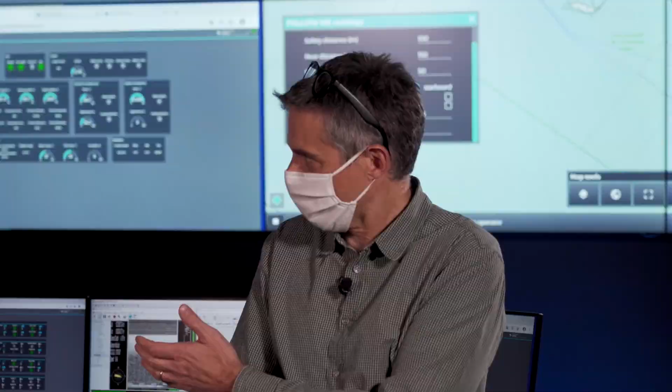We'll go into more detail in a second, but just a bit of background on what we're going to do and why. We had hoped to meet many of you at Oceanology International in London this year. We haven't been able to do that. One of our goals at that event was to show DriX in operation, and because we haven't been able to do that, we've made this small movie.

What we're going to do is show you the operation with two DriX, which we're going to control in the Mediterranean, in the south of France, doing two separate missions with two different payloads and two different survey softwares operational in each, all from the control center here in Paris. We want to show some features of the software and the general DriX control environment.

Maybe Olivier, you could start by giving us a quick overview of what we've got here in this control center and how it fits together. On the big screen just behind us, we've got the DriX HMI, which will allow us to see all of the parameters from both DriX and actually conduct and supervise the operations. We've got access to all power supply and all telemetry data inside each of the DriX.

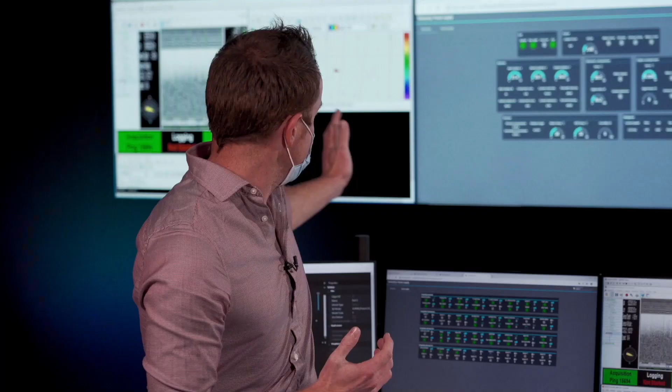We also have the survey navigation softwares. We're using two different kinds of navigation software for this demo. These four screens are actually repeated on this monitor here to give the operator a nice look at all of the data, and being able to do all of this quality control as the operations are going.

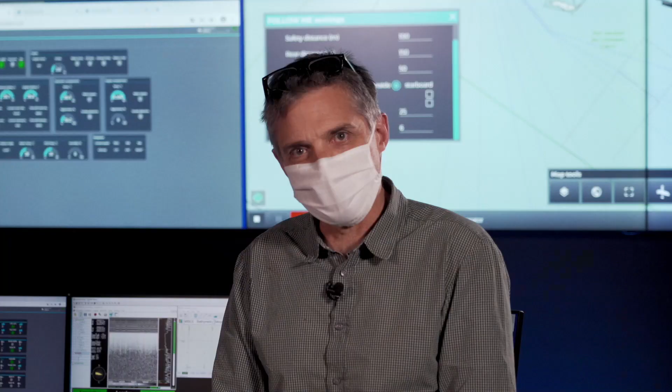Okay, so quite a simple setup. We've got the survey operation, which is really what this mission is all about. We've got the vessel control for each of the DriX, and then this general overview of the entire mission. Okay, great, that's a good introduction, Olivier. So now let's get to work.

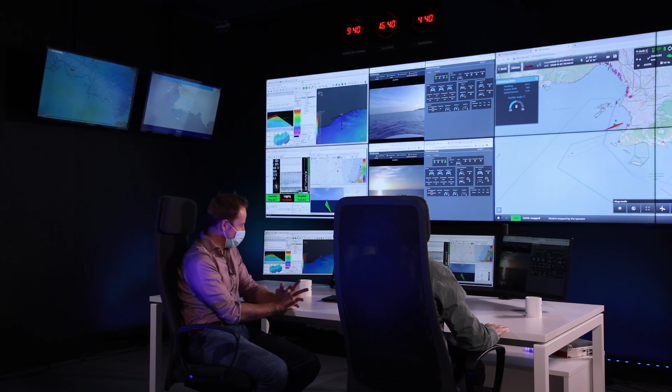Okay, so Olivier, we've got the setup, we've got our two DriX on station. We can see on the big picture here the overview of the two DriX. So let's get to work. Where are we going to start? I suggest we start with Marseille. What do you think? Okay.

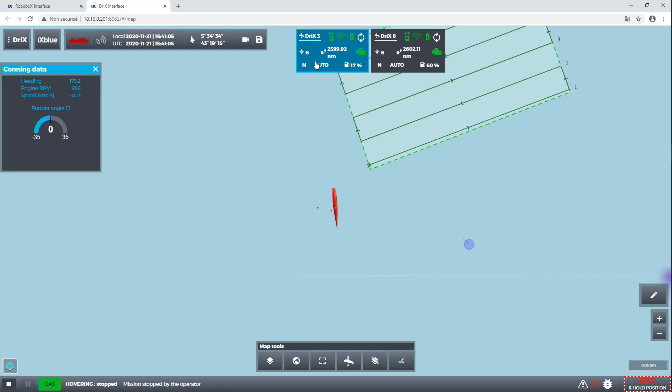So what I'm going to do first is put the DriX that is in La Ciotat in standby. We don't want it to drift around. So from the main DriX HMI, I'm just going to click on DriX number 3, which is in La Ciotat. It's going to zoom in onto it. So here on the screen we are in La Ciotat. And I'm just going to use a mode that we call hovering. So right-clicking, hovering mode, then it draws a circle, and DriX will have to stay within the circle.

I just define the radius of the circle. For example, let's put it to 50 meters. Okay, I'm going to put it to 8 knots. And then I have the possibility to launch it on its mission using the play button. It just starts, and then you see a green route that is designed.

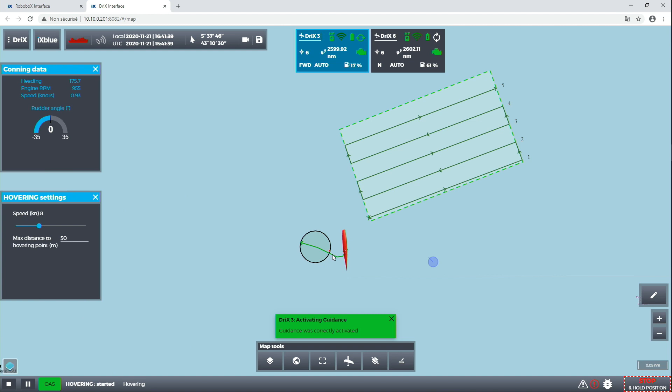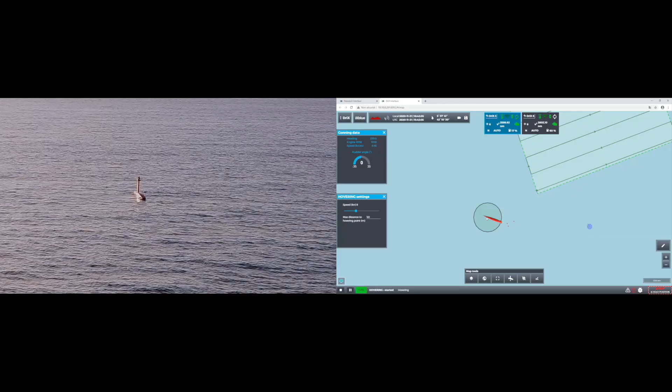That's the computation of the route to go to its mission, and you see that it's turning and going into that circle. In the conning data here you see the speed, you see the heading, and you see the engine RPM. As soon as it reaches the middle of the circle, it will stop. And if the waves or the wind are blowing it out of this circle, it will directly maneuver back in. Okay, so this one is in standby.

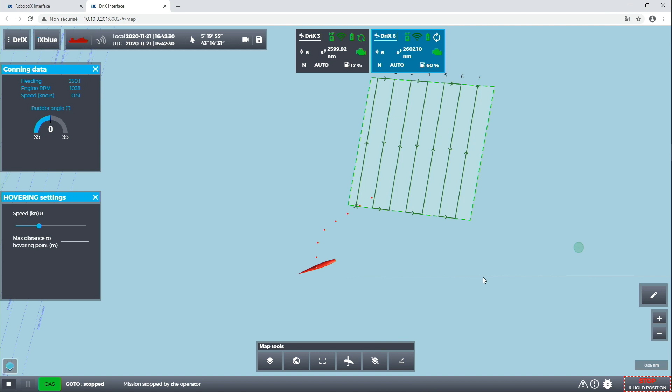Then I'll click on DriX number 6, which is the one that is in Marseille. And then, boom, we're in Marseille on DriX number 6. And we've got our lines that are ready for our survey. We've just done the sound velocity probing using our winch that is installed on the DriX.

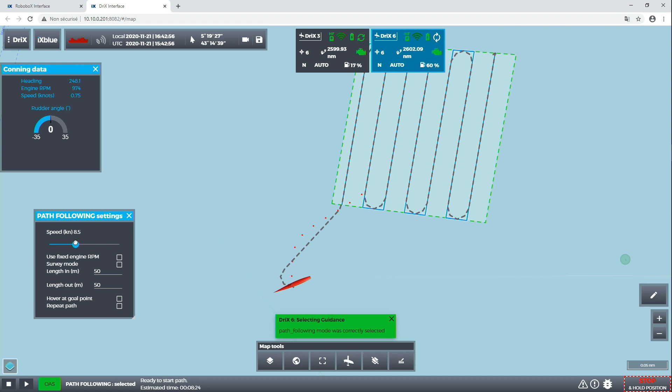So now we're ready to actually launch the survey lines. More or less the same process that we do with the hovering. This time I click on the lines that are displayed, then right click, select the line that I want, path following mode. I get access to a menu where I can define the speed that I want to perform my survey at. I'll define a survey mode because I want all the turns and everything computed by DriX. So I have my theoretical lines from my survey navigation software that I transferred onto the DriX, and it's taking care of the rest, basically.

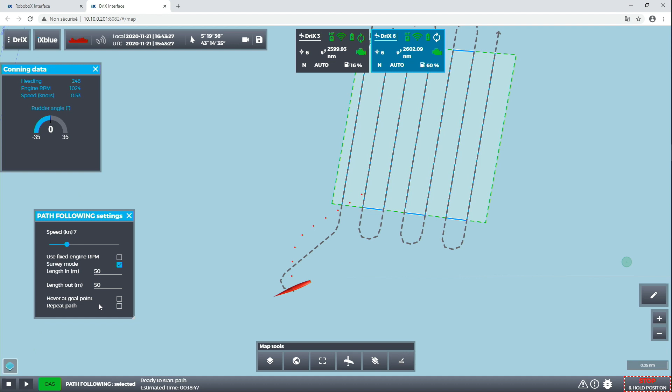I put a length in, length out, which has some distance that I want to add so that DriX is able to be well aligned with the theoretical line. And I can launch it onto its survey. You can see the same green route, and now DriX is ready to start its survey.

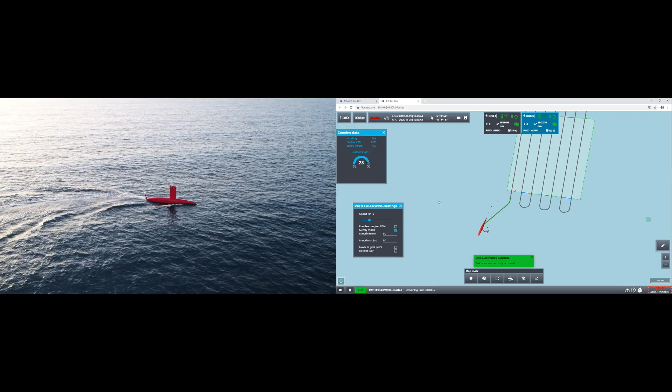So we've got our auto recording on for our survey data, and we've got the anti-collision on, so we're ready to leave it to its mission. I see on the screen that it shows the remaining time of the survey plan, which is 18 minutes and 22 seconds, counting down as we go.

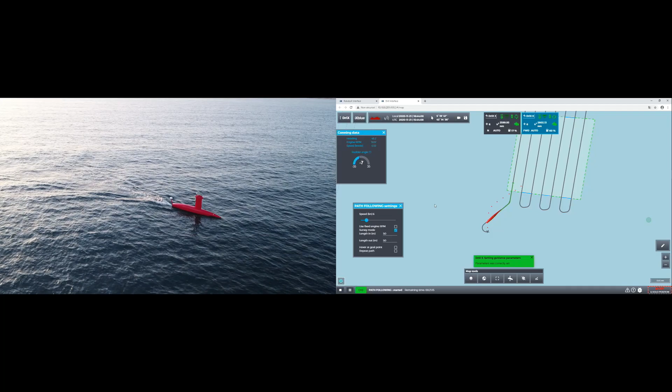Exactly, so that's up and running. We can leave it to itself. It's going to perform the survey route and the anti-collision in case there is something on the route, and take care of any obstacles on the way.

So just a quick note on obstacle avoidance. The anti-collision is a combination of several sensors that we integrated in DriX. The first one is the AIS receiver, so we are receiving the positions, the course over ground, and the speed of other vessels that are using AIS.

Then we've got three other components: the infrared camera, the LiDAR, and the radar. The infrared camera looks in the direction DriX is going and plots even small objects like buoys. The LiDAR does the same but all around DriX, with a range of about 100 to 150 meters. And finally the radar gives us a bigger picture of the environment around DriX with a range of about 1,000 meters, and is efficient at detecting vessels moving fast.

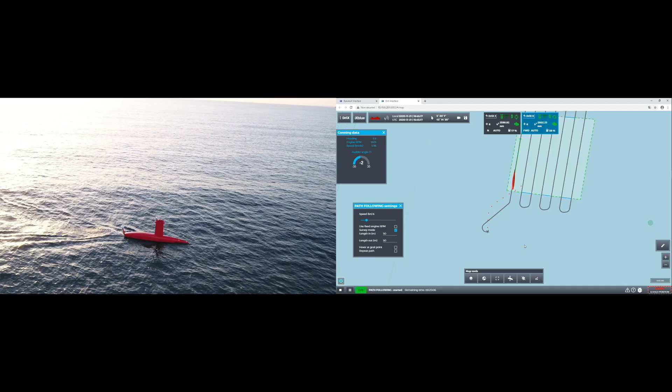Sure, and then the collision avoidance algorithms are basically amalgamating all that sensor data and resolving any issues. Exactly, combining everything together, and we'll be able to see the results afterwards.

You can see already on the screen a green circle on the right side of DriX, which is an AIS plot, so there's a vessel there. And when it's one of the other sensors, it'll be a blue circle, so we'll be able to see if there's a vessel on the way.

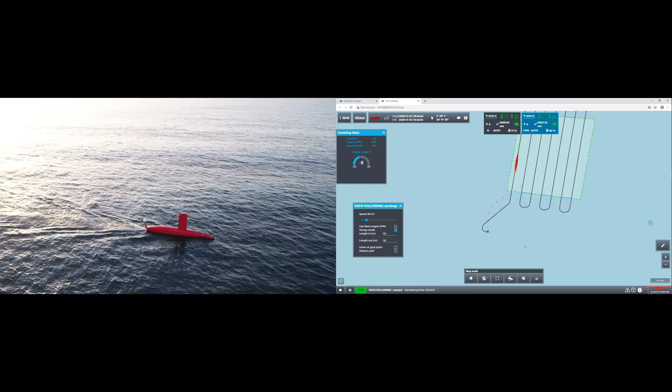So we're going to leave this DriX getting on with its work, and let's get back to put the other one to work. Okay, back in La Ciotat.

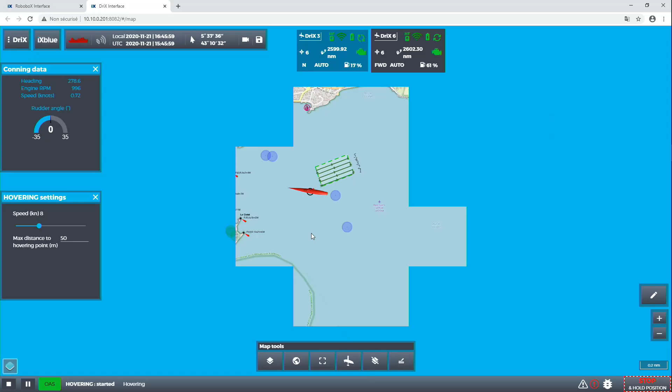Same procedure, I just click on DriX number 3, and I'm back here in the middle of the Bay of La Ciotat. So DriX is still inside its circle. We can see from the plot that it moved, but it's actually still inside.

So I'm just going to stop this mission, because for it this is a mission staying within this circle, and I'm going to launch the survey lines just like I did with the previous DriX. Same procedure: you can create your theoretical lines within your survey navigation software and then just download that into the DriX HMI to have them displayed on the main DriX software.

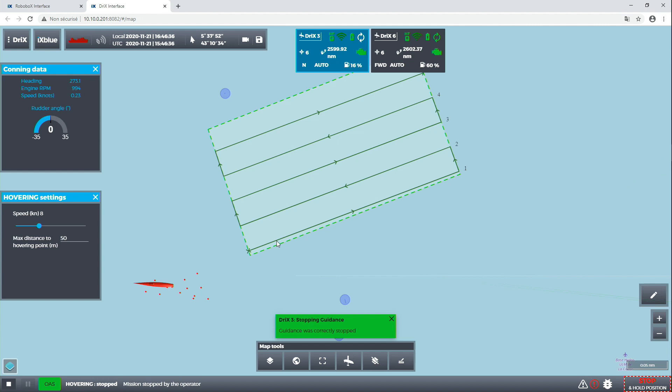So if I click on the main line, right-clicking, line, select path following mode, boom, I have the trajectory just like we had on the other DriX. I use again the survey mode, and I'm going to put maybe 50 meters and 50 meters, so you can see that it's adding some distance extra.

8 knots is fine for us, we can do a fast survey. And the same way, I just have to launch it on its mission.

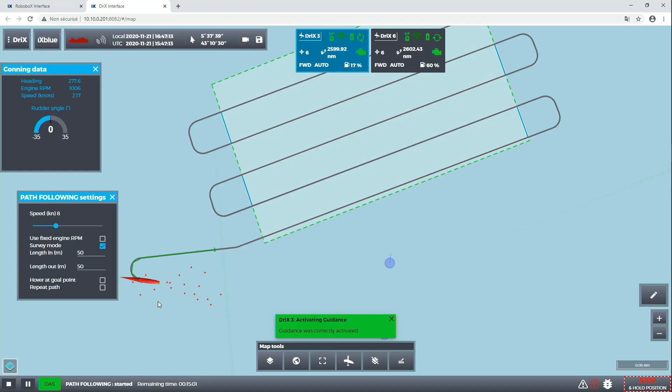As soon as I press the start button, you can see again the same green trajectory. And like you mentioned, the remaining time is really accurate, and it really helps surveyors when they have to plan several surveys. With this method, they know exactly how much time it's going to take.

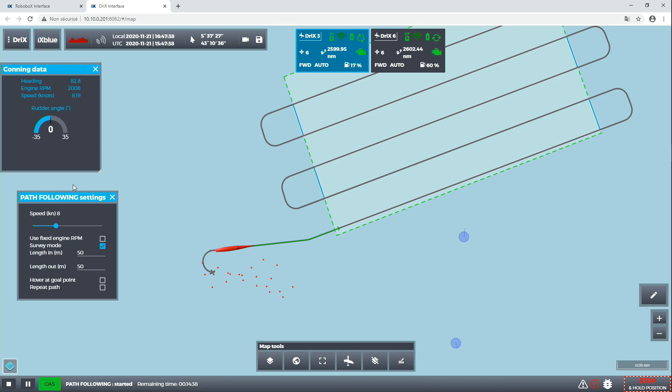Very useful, exactly, given our 30-minute window for this small demonstration. You can switch from one to the other. If I increase the speed, like I'll do just to check, 10 knots recomputes the remaining time straight away. So it's really efficient and really accurate.

And you can see that it's about to start its line, and it's going to start its survey in a minute. Same procedure, auto recording and anti-collision on. So basically, we can leave it to it.

Exactly, to its business. Zoom out and back to the other one to see how they're getting on over there. So if we get back to our DriX in Marseille, it's started its second line.

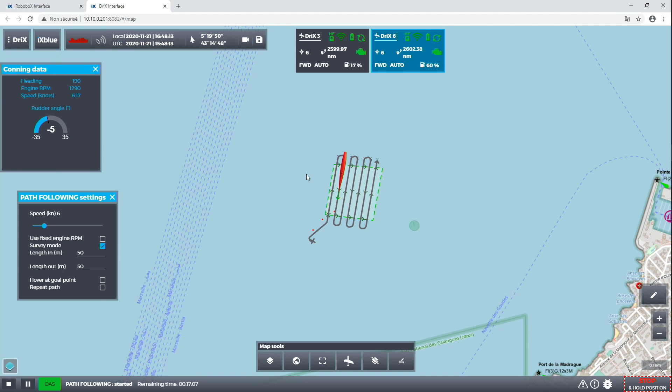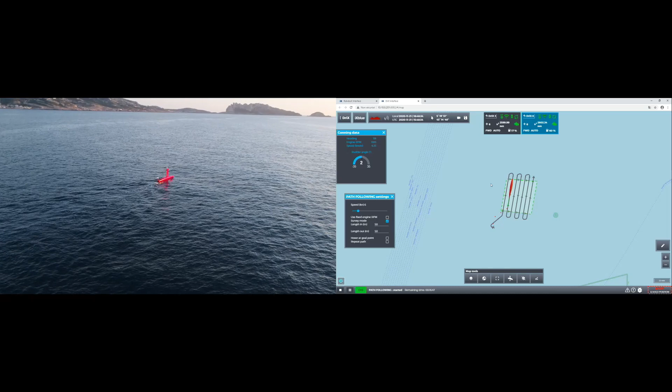We are monitoring, as an operator, the telemetry data for both of the DriX units, and also the forward-looking camera of both DriX, which allows us to see how they are on the field and monitor all the parameters. But as a surveyor, we'll focus on the survey side.

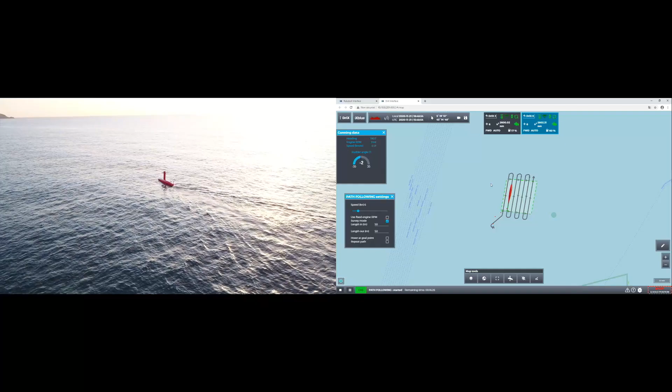So DriX that is in Marseille is combining two different sensors. We've got a multi-beam system, which is a Kongsberg 2040C, and we've got a sub-bottom profiler, which is an iXblue Echoes 3.5K. Both systems run at the same time within the gondola that is 2 meters below the surface. We also have the inertial navigation system from iXblue, the Phins, that is in the gondola, and we've got our GNSS in the mast that provides the position.

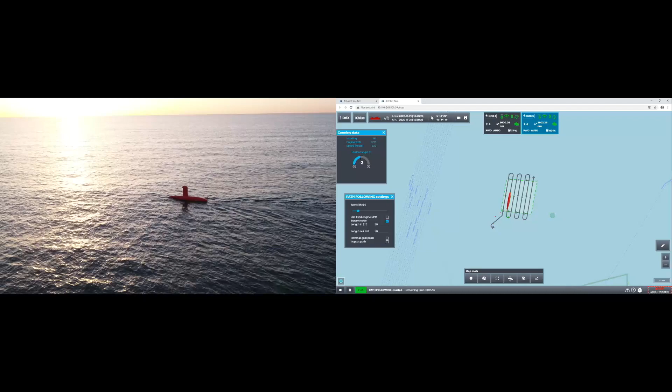So DriX number 6 that is in Marseille is running with the survey navigation software QINSy. But just like any other surveyor and any other conventional survey vessel, I can quite easily access all of the data that I'm interested in.

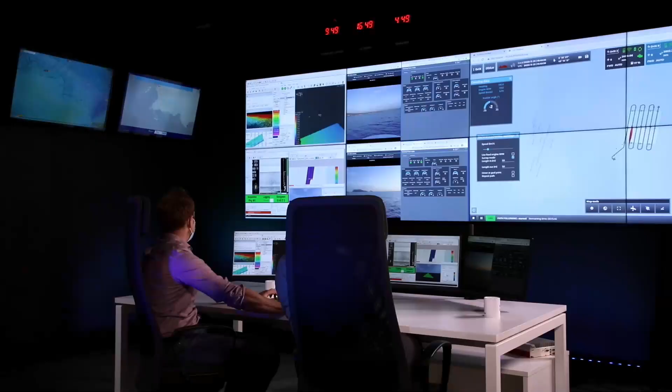So I've got my survey map with my survey data. I can switch on to looking at the bathymetry, for example. If I go on there, I have access to quite a lot of interesting data. I'll switch from the standard deviation to the bathymetry to have a look. Okay, so I can see my bathymetric data. We've configured the 3D display to look at the full swath of the bathymetry on DriX.

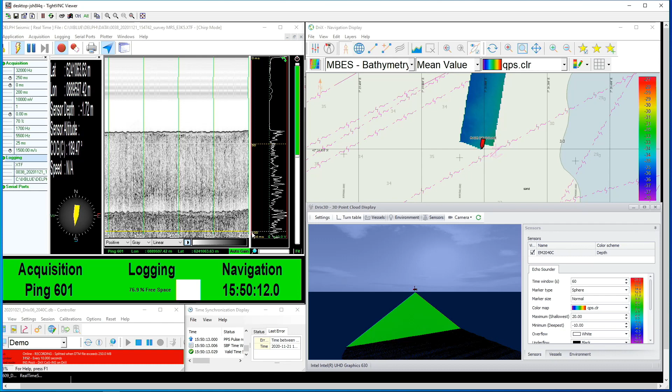And we've got our sub-bottom data that we are recording at the same time using Delph acquisition software. So we've got our complete setup, and just like any other conventional vessel, we're following and making our QC of the data, in normal conditions I would say.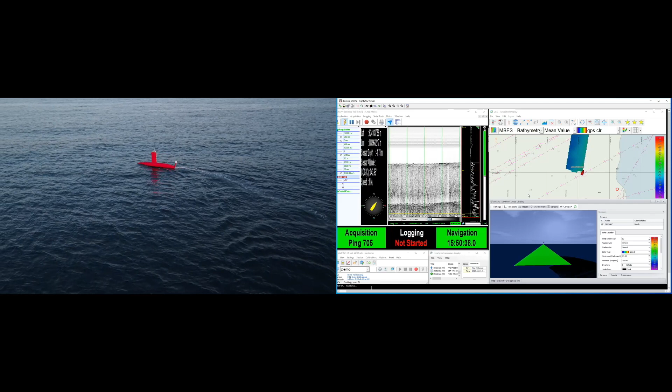And so in this particular demonstration, we're working with a 4G communications channel, which is providing sufficient bandwidth for the control and also the QC of this data.

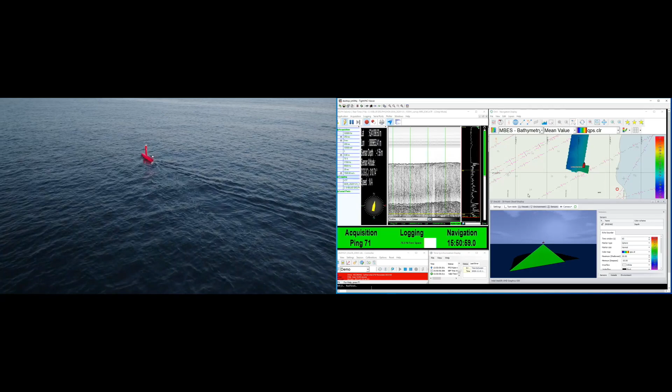We've got several ways of communication. Obviously, over the horizon, we've got the 4G. We are quite close to the shore. We've got a SATCOM high bandwidth, and a SATCOM low bandwidth. So basically, we always have a backup to have redundancy and to be able to switch from one to the other. We've also got a simple Wi-Fi connection or an MBR connection, which is for when you're working with a mother vessel and doing a combined survey together. Everything is already installed in the mast, so you can configure it the way you want, which gives quite some flexibility.

So this survey is going to go on for another 13 minutes. We're not going to stay and watch it. Should we call a halt to this and send it on its way home, and then we'll get back to looking at how the other boat's getting on. So show us how we can direct things from here.

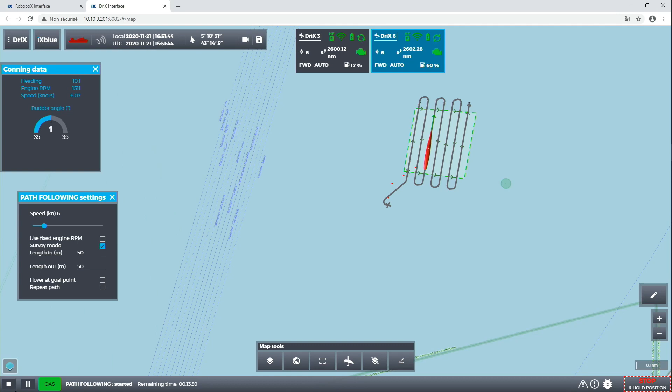Yeah, it's quite easy actually. Same way we launched it, we can stop it using the stop mission button. So if I click on this one, you'll see that straight away we don't have this trajectory calculated, and DriX is starting to slow down. Basically, it's just waiting for another mission.

So we're just going to draw a route to go back to La Ciotat. That's where it's going to be picked up by our support team there. If I go to the edition menu, I can simply draw a line that goes from where the DriX is, all around, and then back into the Bay of La Ciotat.

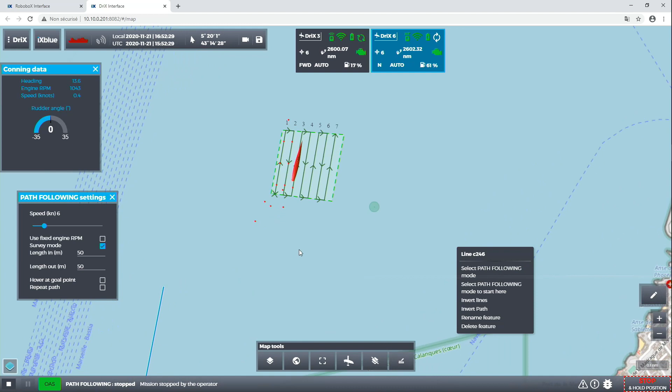Okay, then I just have to right click. I'll zoom on where my DriX is, and I can just select path following mode. Straight away you've got the trajectory that is calculated. I can remove the survey mode because we're not doing survey anymore, and I can increase the speed a little bit because obviously you want it to be quickly back in La Ciotat.

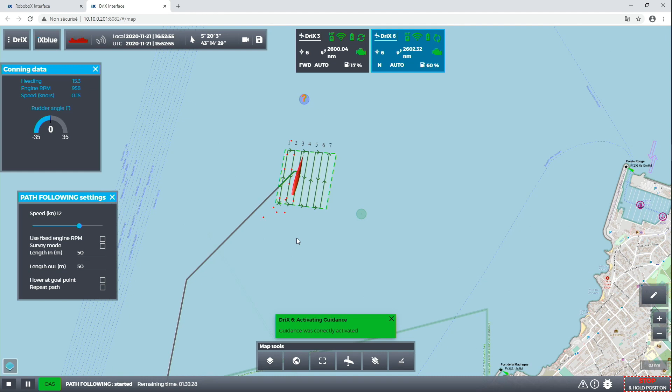Interesting thing here: we know that it's going to take 1 hour and 30 minutes to go back to La Ciotat. So as soon as I launch the mission, I can call the support team and say, okay, in about 1.5 hours, you will be able to see DriX getting back to the Bay of La Ciotat.

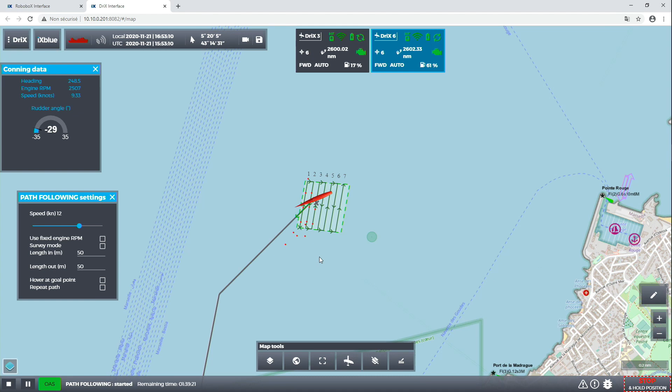Perfect. Okay, so we can leave that to come home on its own, and then we can maybe just pop back to the other mission in La Ciotat and just see how that boat's getting on.

So just clicking on this one, we get back to the DriX on its mission. I'm going to increase the speed a little bit. Yeah, let's see how fast it can go and still get good data.

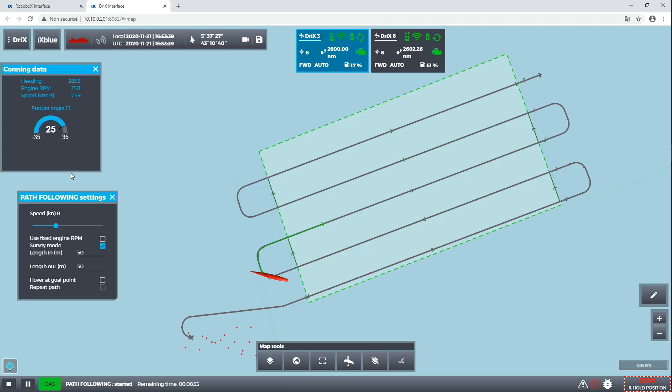So we're currently at 8 knots, as you can see on the conning data. I'll increase that to 12 knots to see how it's behaving. In the middle of the turn, you can see that it's still keeping a trajectory that is straight on the theoretical line.

So the line keeping is excellent, and same as we did with the other DriX, we can switch onto the survey navigation software. On this one, we've installed the EIVA NaviPac, so it's different from Qinsy, but it gives you basically the same overview of all of the survey data.

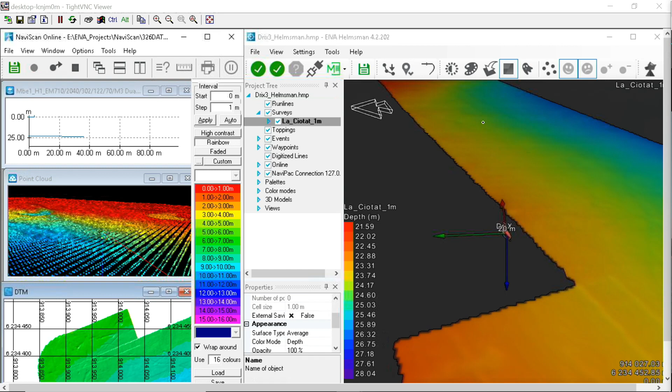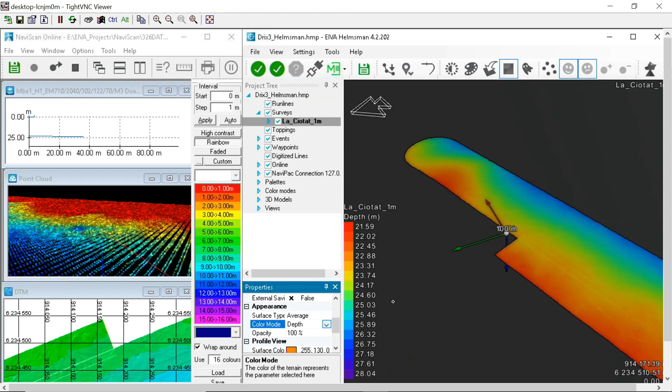If I go onto the software, basically you've got the same 3D view with the DriX running its line and the bathymetry as it's being recorded. I can also switch on to see the standard deviation to check that everything is going well. So instead of depth, for example, I can show the standard deviation.

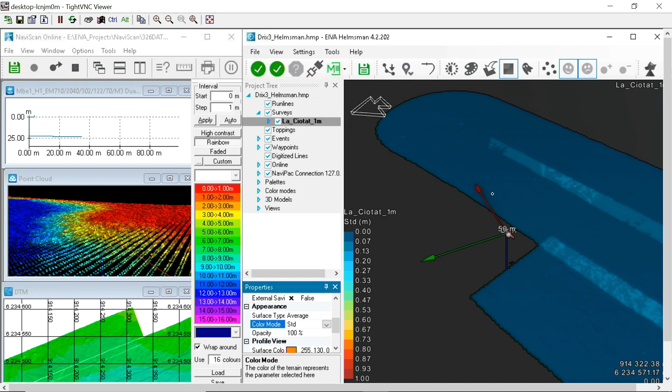And then we've got all of our 3D beams. We've got another access to all of the survey parameters coming in - the GNSS positions, the INS data, everything put back together in our navigation software. So once again, same as for Qinsy, we've got full access to all of the bathymetric results. Essentially, the survey operation and survey QC is really just the same as if you were on board a normal conventional survey vessel, but remotely operated.

As we see, either with a range of different sensors, different very flexible software options, and so on. Okay, so Olivier, let's call a halt to the mission here now, and let's have a look at the obstacle avoidance features that I know you wanted to show us.

Okay, so I'm going to stop the mission, just clicking on the stop button, and I'm going to move the DriX. To do so, I'm going to just right-click, go to mode, and then I just launch the DriX.

Same vector, then it's going to head back to port actually, and on the way it's going to... can slow down a little bit to 10 knots. Yeah, probably a little bit too close to the shore.

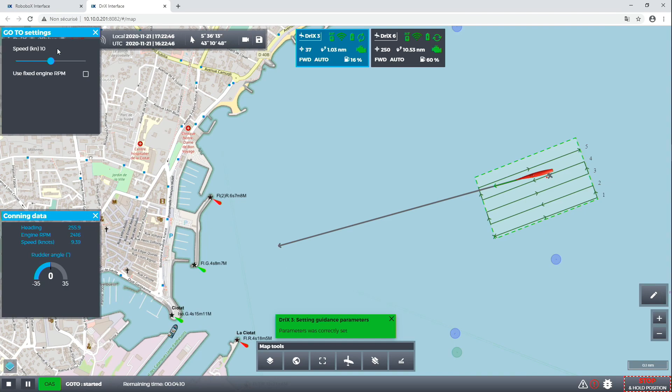And then at some point we're going to put our vessel on the way, and we'll see how the DriX managed to avoid it. So to be clear here, this is a scenario that we are laying on for ourselves - we're not going to frighten any other users on the water. This is our boat, which is going to intervene in the DriX mission, essentially.

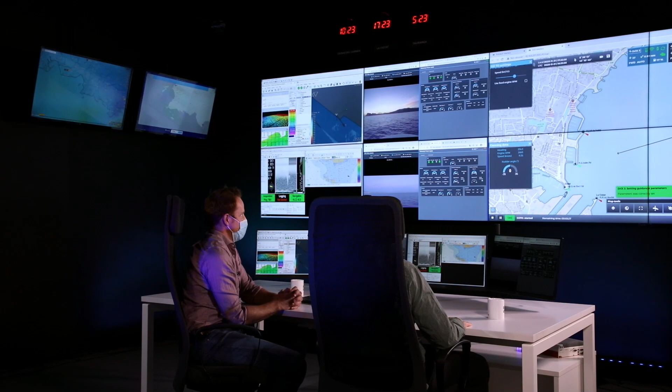Yeah, exactly. So it started its line, so it's gonna - that's why I'm gonna increase a little bit the speed. 12 knots is still okay for the DriX.

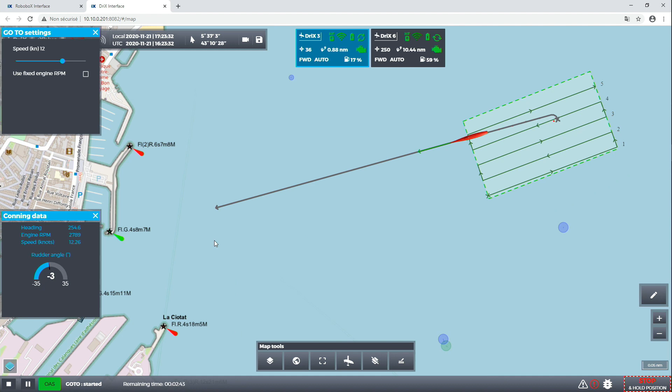And as soon as he plots something on the screen, like we said, like the two blue circles - there's actually one that is blue and green. That's because we've got the AIS and the plot from the radar. As soon as it's going to see an object or a vessel on its line, it's going to integrate the positions from the radar, and then it's going to avoid it.

So actually we can see it on the screen that our vessel is going on the way of DriX. We can see this line here, which is the computed vector from DriX, taking into account the speed and the evolution of the position. And you can see that the green vector here is for now still on the line that we drew - that's the theoretical line.

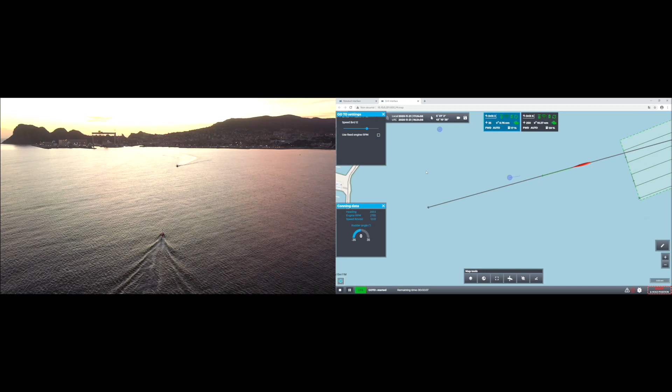And as soon as he will see that it's too close, he's gonna move this green route away from the actual route. Boom, okay, you see? So there we go. It's analysed that there's a potential collision and made an immediate alteration. So I think we are about 250 meters from it, still at 12 knots, so it's quite efficient.

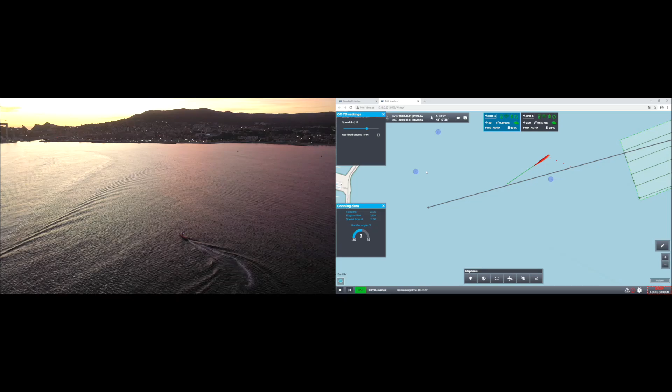Sure. And as soon as the vessel will leave and he sees that it's no longer on the way, you can see that the green vector is already getting back to the line that was supposed to be taken, and then he's going to follow until he reaches the end of the line. Well, that's a great little demonstration, and I think, so then it'll just come back onto line and carry on.

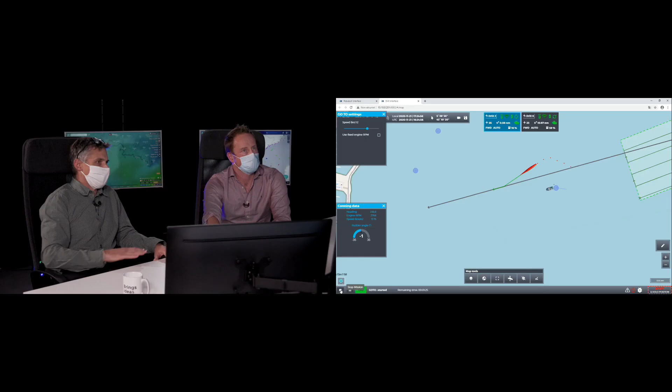Yeah. And I think, so then you wanted to show us some other features of the software and the control, the aspects of the control system.

Another feature that is interesting, you can see that we've got what we call our mother vessel that is now displayed on the screen. This is a small boat symbol. We like to use this feature because sometimes when we have to go out with DriX, we've got quite long transit to do, and we don't want to have someone just looking all the time at DriX and monitoring the route and the safety of the route.

So it's broadcasting its identity essentially as a DriX mother vessel. Exactly, we are receiving GNSS position from the mother vessel. It's a simple GNSS antenna, and that allows you to use what we call the follow me mode. The follow me mode is the ability of DriX to follow the mother vessel, even if it's moving, depending on the speed.

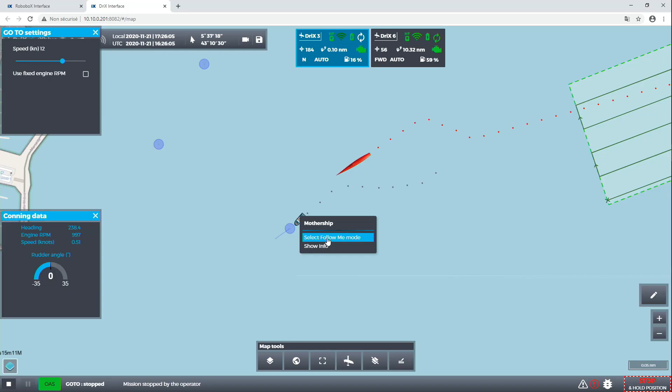If I right click on the symbol of our mother vessel, we can see that there's also the target on it, and I use the select follow me mode. I have access to this menu here, which I can set a few parameters. I've got the maximum speed that I want the DriX to reach. Obviously, if the mother vessel is not going very fast, the DriX will not go very fast. I've got a safety distance, which is the minimum distance to the vessel, the rear distance I would like it to keep, and then a few other parameters.

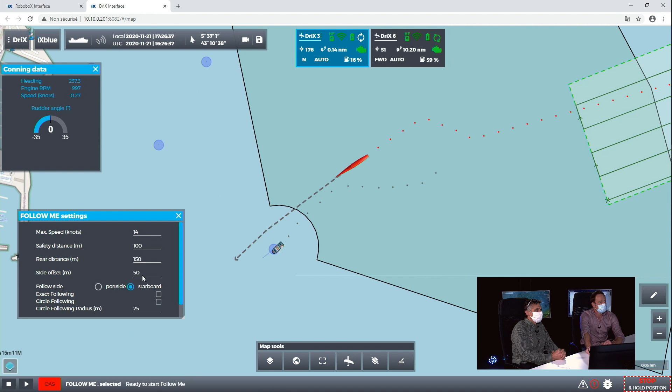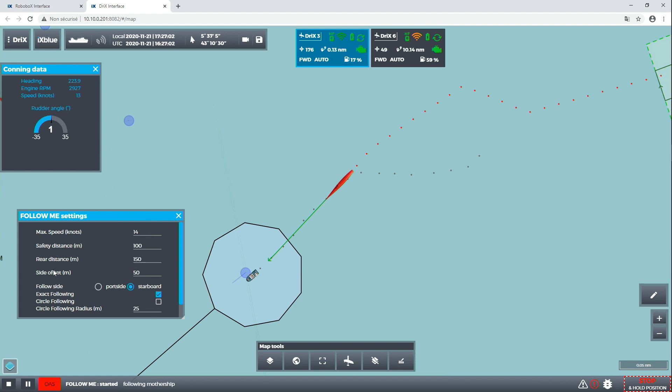I can use the exact follow me mode, which will make the DriX follow exactly the path of the vessel. So even if the mother vessel is moving like this, DriX will follow exactly the same trajectory. I can also use another option, which is adding a side offset, whether on port side or starboard side, from 50 to 500 meters. I can have the DriX running just behind the vessel, but on the side, so it will not follow exactly the GNSS path. But that's also another option.

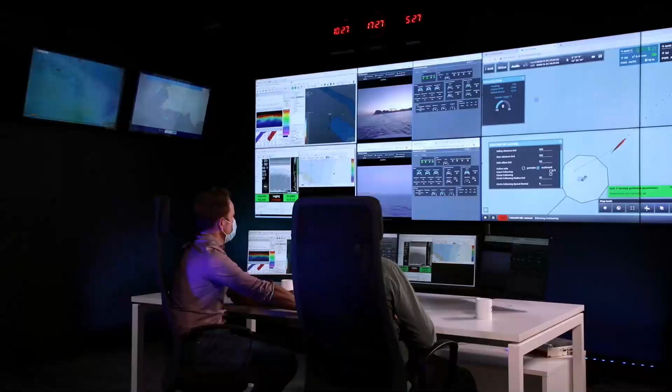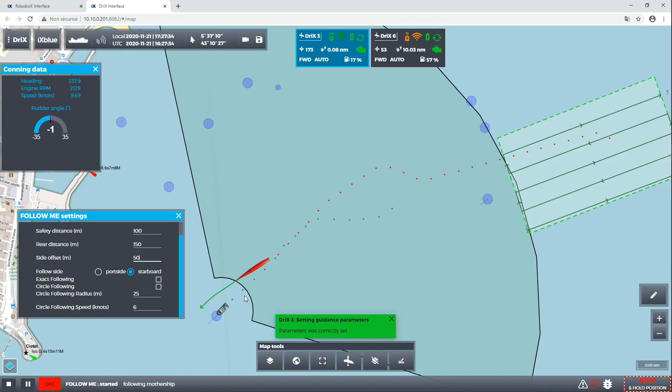So for example, if I unclick this one, you can see DriX is going straight on starboard side because there is a side offset of 50 meters on starboard side. It's also an interesting feature if you have to conduct long transit between several survey areas, for example.

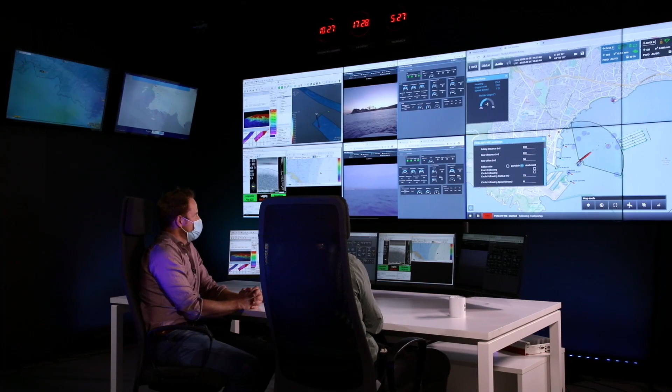So this feature here we're going to use to allow the DriX in La Ciotat to be brought home safely at the end of the day. And presumably the same features you can use to allow the DriX to come into the deployment system, the DDS? Exactly, it's the same working scenario, the same functionality. That's what we do most of the time when we have to recover DriX. Then a pilot will take manual control until we reach a port, and then they will recover it.

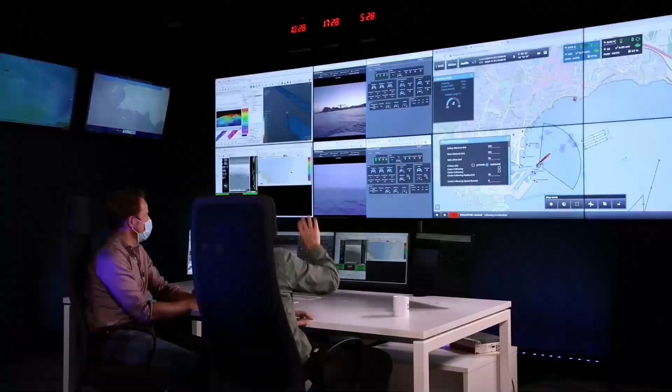Yeah, okay, well I think that's excellent, Olivier. I don't know if there's anything else we want to show in the menus, or if we can go quickly through the menus.

Basically, we've got access to quite a lot of functions. So the DriX deployment system that you talked about, we are interacting as well with the DriX deployment system when it is deployed on the project. Yeah, opening the arms that will allow DriX to come in and closing them. This is done also using the same interface. We are able to tune the obstacle avoidance parameters depending on the area you're working and different situations.

DriX configuration, which allows you to get access to a lot of parameters. That's Wi-Fi, that's the connection type, that's the lever arm in your DriX, for example. The telemetry is what we've seen already. Yeah, so basically all of the parameters.

The keel - so we are able, from the control center, to bring the keel up and down. Obviously there's safety precautions, safety limits on it. We won't be allowed to bring the keel up if the vessel is moving, obviously - it has to be stopped. Most of the time, the DriX pilot from the remote control will directly bring the keel up and down. The SVP winch that we talked about when we did the cast for both surveys.

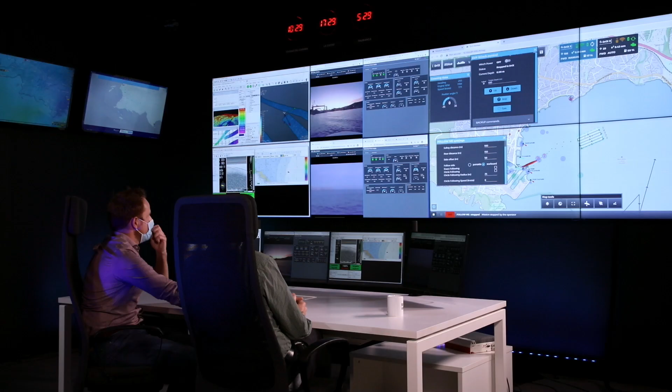If we have a quick look at it - so we can power it on and then put a depth target, and then the winch will automatically let the sound velocity probe go down. We've got 500 meters of line on the winch, and then we bring it up, and it will automatically stop when it's reaching what we call its docking station.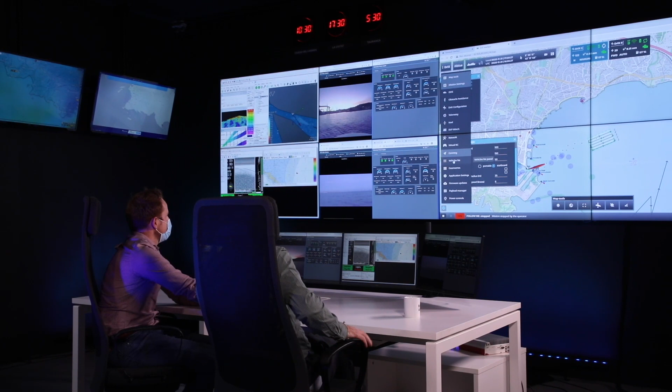And the virtual remote control - we are able to synthesize a virtual remote control directly from the software, which will allow you to actually drive the DriX if you want. And the conning data that you've seen already, which is the basic information from DriX. So that's a very quick snapshot of the software for people to get a feel for it.

Very rich environment. I think that's what we've got time for. I can see the sun going down in the Mediterranean there. It looks wonderful, and the DriXs are on their way home. Exactly, so I think that's all we've got time for.